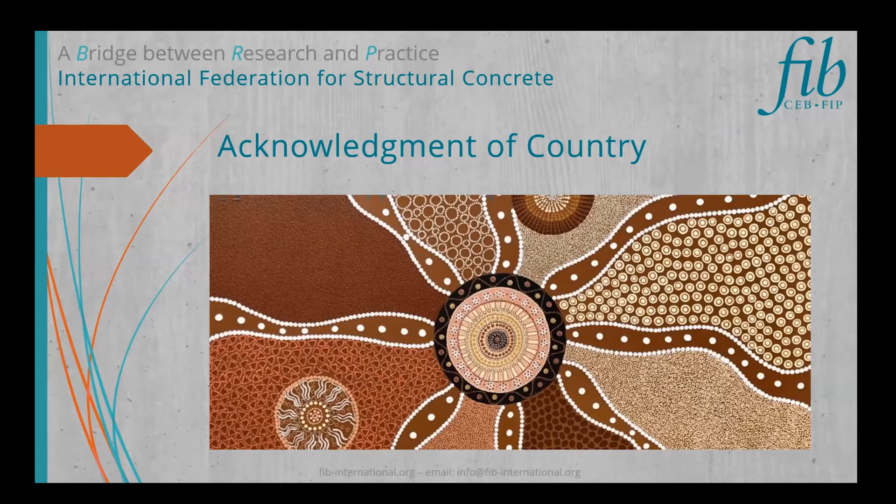But fundamentally, when we're looking into durability, we want to ensure that we can meet the requirements of serviceability that typically relate around the loading, the cracking, the deflections, but also those of strength and stability through the design working life without significant loss of utility or excessive unforeseen maintenance. And I think it's that latter part that is causing us a lot of issues nowadays. We all accept that we'll have to apply routine operation and maintenance, but when you have to intervene to apply major repair or rehabilitation of your structure, it is not meeting that intended serviceability and durability requirement.

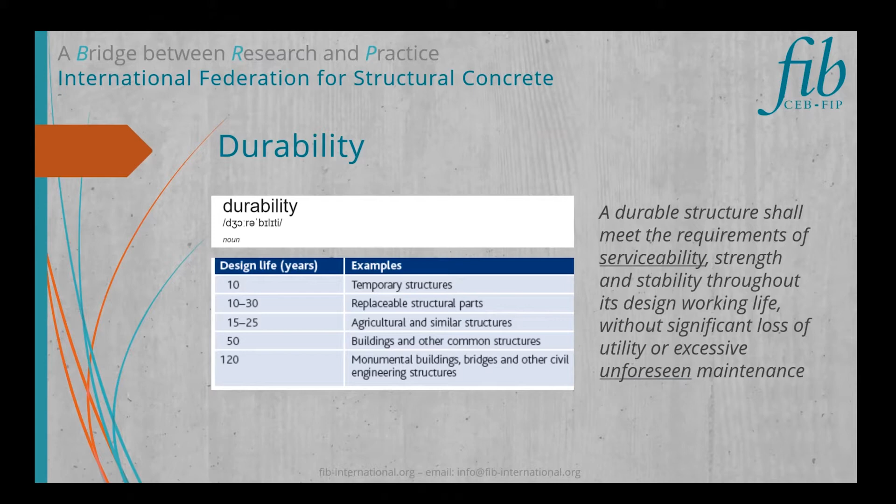Now, I do remember my early days, even when I was a student. Most people think of concrete as a material that is gray or brownish in color, and one that is consistent. In reality, concrete is naturally porous and it is inhomogeneous. And you can really get the appreciation of that when you slice through it and you put it under the microscope. It's very important to also remember that the size and distribution of all the pores in the concrete varies from one to another, and it really depends on the mixture of the constituent materials, the quality of compaction, the different materials that are used in the mix design and the location that one may be, the water to cement ratio, which will affect its hydration, and of course the curing that will be applied.

But fundamentally, concrete is not a proprietary product, it's non-proprietary. What that means is, while we can go and source concrete from different manufacturers, it's not a standardized product off the shelf in the same way that you'll go and buy a replacement light bulb for your living room. Also, the service life of concrete structures tends to vary. Now, in the past, we had a very simple approach of deemed to satisfy. So if the designer and the contractor met X, then its durability in theory should have been satisfied.

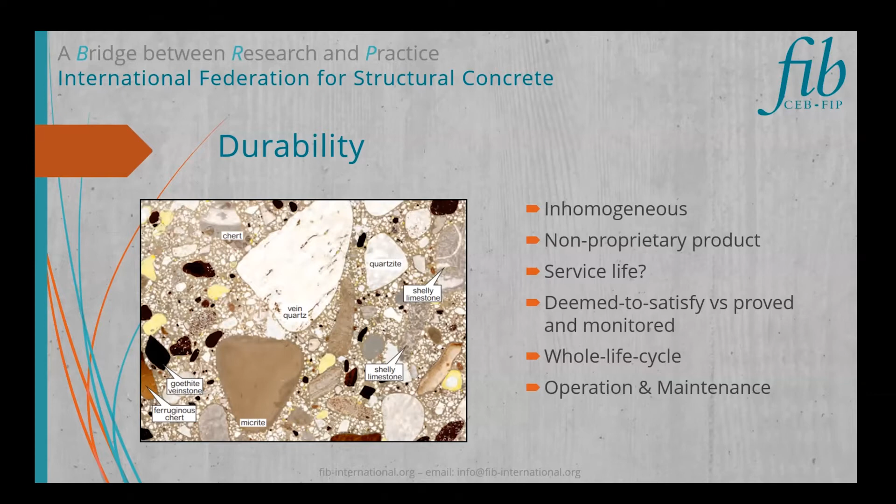Before we go into too much detail around hydrophobic impregnations, I want to discuss briefly the transport mechanisms for the ingress of water, gases and ions. Fundamentally, these are threefold. You've got diffusion of free molecules or ions, which happens due to a concentration difference. You can have permeation of gases or liquids through water-saturated specimens due to hydraulic pressure difference, or capillary suction of liquids due to surface tension acting in capillaries.

So typically, the majority of this will happen either due to diffusion or capillary action. Permeation, unless you are in an environment where you've got full water saturation and you are immersed underwater to have that hydraulic pressure, in the majority of cases doesn't happen. Capillary will tend to be the first transport mechanism that kicks in, because that's where you'll have that contact between your concrete surface and a liquid.

And in the long term, diffusion will add to that effect, because there will always be that concentration difference from the outer edge or outer fiber of the exposure face to the other side, or perhaps to your core, which may be at nil, and that concentration difference will continue to drive diffusion pretty much in perpetuity.

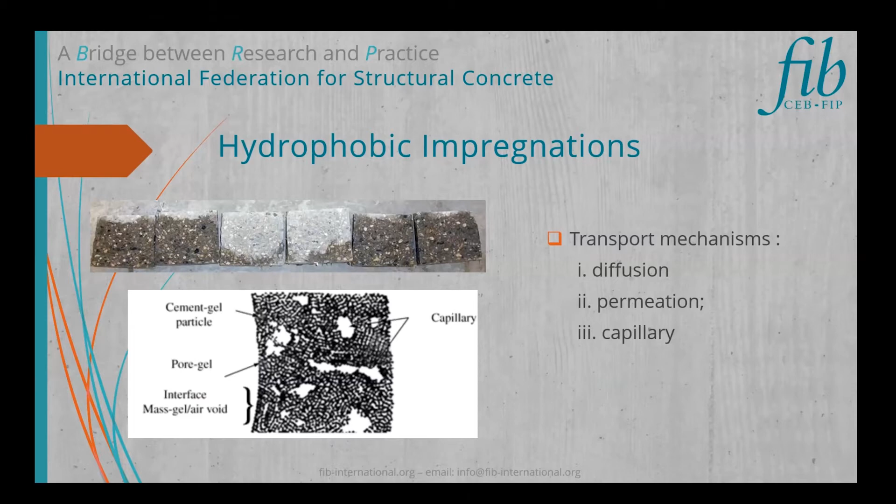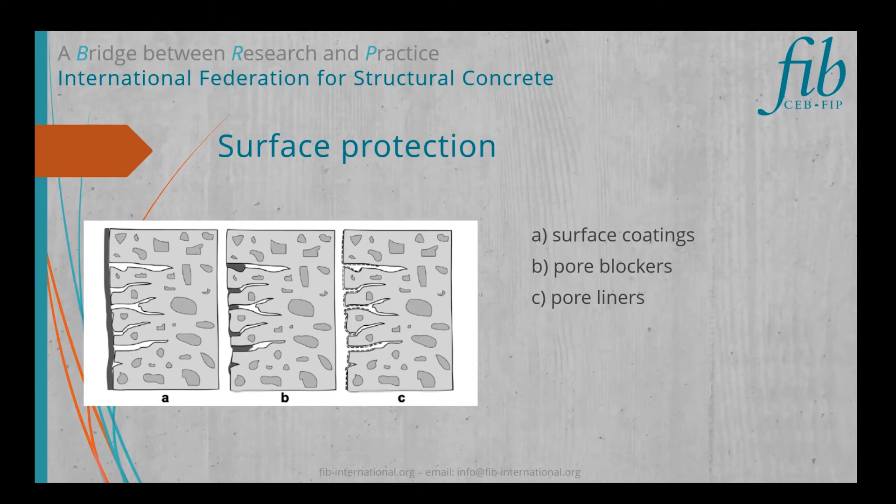Now that we understand the protection mechanisms, people tend to apply three different surface protection approaches. The first one includes surface coatings. They're very common, such as waterproofings or others. The second one is that of pore blockers. So there will be specific constituents that you may want to apply at the surface of your concrete in order to block those pores and therefore reduce that capillary absorption. And the third one are pore liners. Today, since we're talking about silanes, I will focus on that third form of pore liner.

Now, fundamentally, silanes belong to a group of silicones which contains just one atom of silicon. A typical example, and this is of an alkyl alkoxysilane, is illustrated in that chemical composition that you can see on your screen. You've got your silicon atom at the center, and then you'll also have your alkoxy groups, which will be linked to the silicon via oxygen bonds. So typically you have three or more.

In addition to that, you'll have what we call the organic alkyl group. This is the group that remains, and that's the one that will protrude through the structure of the silane, and it will provide that hydrophobic behavior on your concrete. Fundamentally, if you think about it and make it analogous to soap, the organic alkyl group provides that fatty character that will help you line the pore wall, and it will result in the formation of the hydrophobic layer.

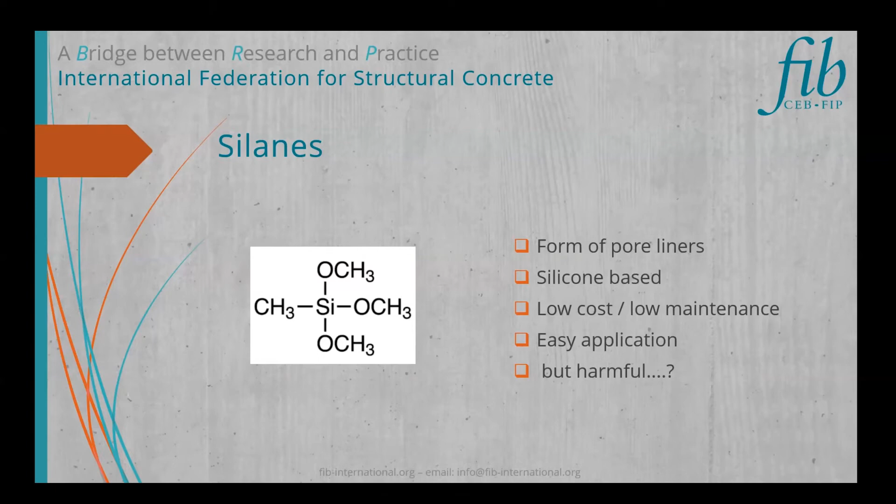But fundamentally, the surface impregnation of reinforced concrete structures is very useful because it can really help to prevent the ingress of water and dissolved deleterious substances such as chlorides. Now, a structure that is protected against water and subsequently chloride ingress can attain a longer life with a reduced maintenance regime. Therefore, this protection or repair method can be really effective in protecting the concrete from chloride attack.

In particular, surface impregnation is very well suited to surface areas which are not subjected to traffic, and as a consequence, there is no mechanical wear of that impregnated surface. In other words, there wouldn't be a pumping transfer of the deleterious materials into the substrate due to contact with the running surface.

It can also be used on brand new structures, not just on existing and aging infrastructure. And when you apply a hydrophobic treatment at that early stage, it can be regarded as an additional measure to protect young concrete and help it to achieve that service life. But equally, it's important to understand when you apply it what is the current condition of the concrete, and it's something that we'll unpack in a little bit more detail in the next few slides.

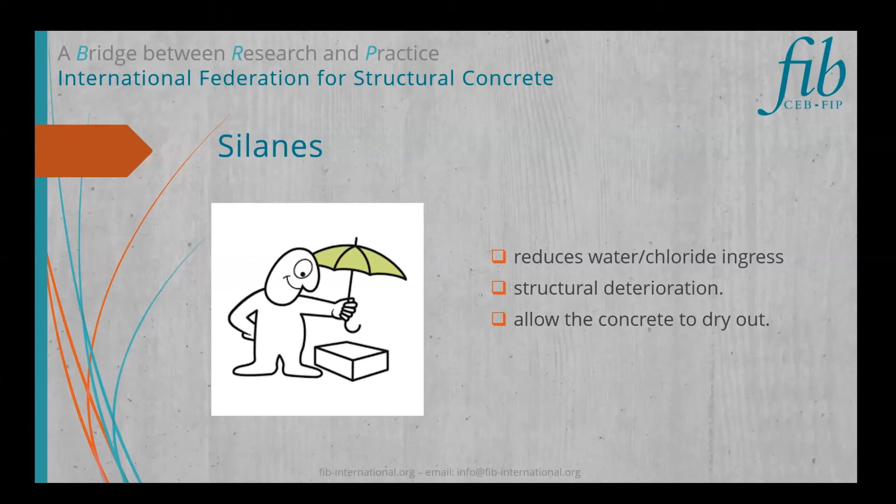So before you think that this is the solution for everything and anything, and you embark and start applying silanes and siloxanes across all your assets, it is really important to consider the following. First and foremost, what is the current structural condition of our assets? If our asset is in a very benign environment or very young in age and is not affected by significant chloride contamination, then definitely silane can be of help.

However, if we can already see that we've got significant chloride contamination and it has potentially reached the reinforcement level, and even worse, it has reached that critical threshold level, then silane will not do a lot, and it will not stop the corrosion process and also the destabilization of that passive layer on the reinforcement. So it's very important to really understand that.

Of course, we also need to take into account what budget constraints the asset owner may have. Money is finite, so making it go a long way is very important. Last but not least, one has to take into account what is the outcome that we want to achieve? Do we want to give a new lease of life to existing structures which have not suffered significant contamination? Do we want to simply slow down the corrosion rate temporarily by allowing the concrete to dry out and stopping new chlorides coming through?

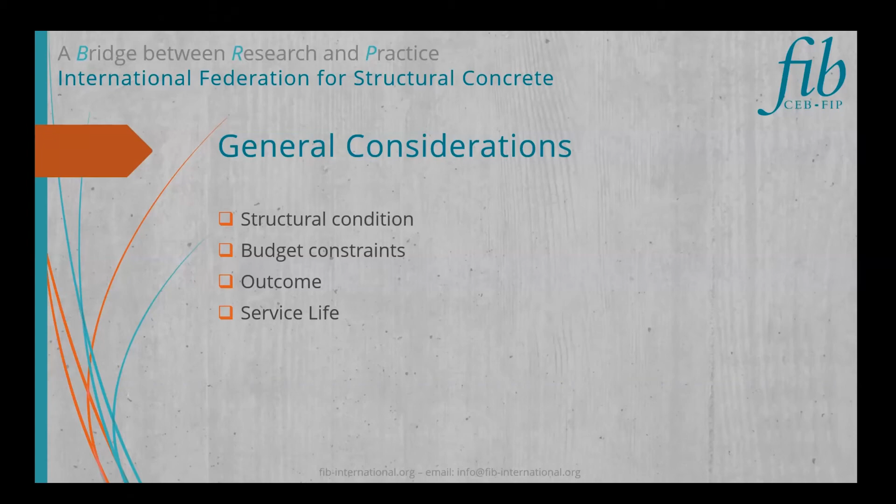In terms of design, we touched upon structural condition, and that is very important. Don't be surprised if your asset is already suffering from significant chloride contamination, and then you attempt to apply a silane treatment, and then you see deterioration of the concrete happening a few years later or at some point down the line. That's not to say that your silane treatment has not worked effectively, but it suggests that the contamination was already too significant and all you managed to achieve was a bit of a slowdown.

Exposure to UV can be a bit detrimental to the long-term performance of the silanes, and also rain. Now, especially the latter may sound a bit of an oxymoron because it's supposed to reduce the water absorption, but what this means is that, as part of the normal wear, it may reduce its effectiveness a little bit quicker than if it was sheltered.

You also need to consider the variety of products that exist on the market, and the surface preparation that will be required. This is linked back to the porosity of your structure, the moisture content, and the dosage that you may want to apply.

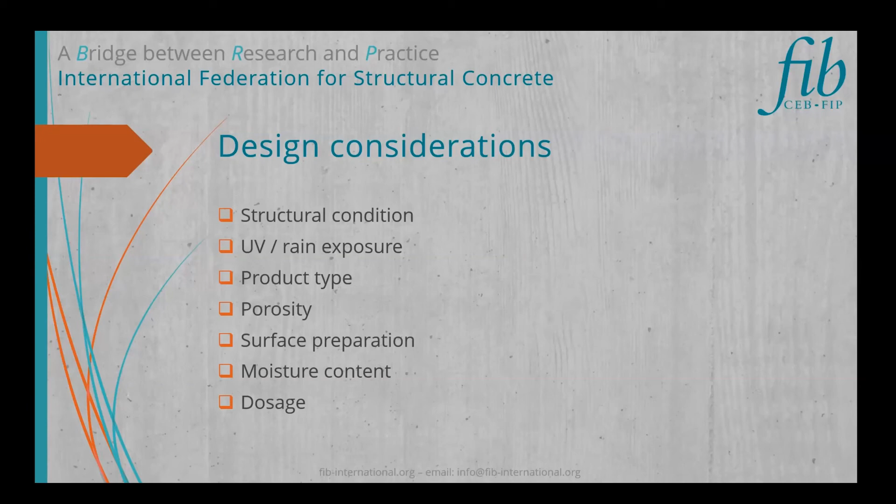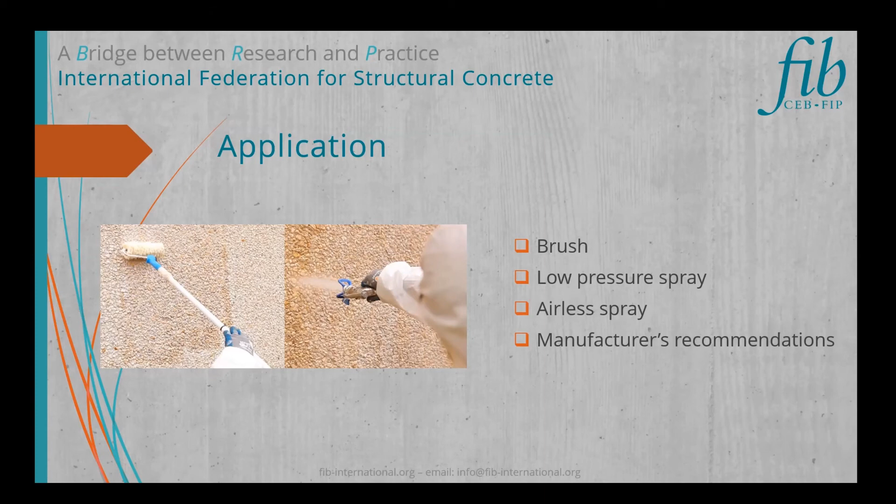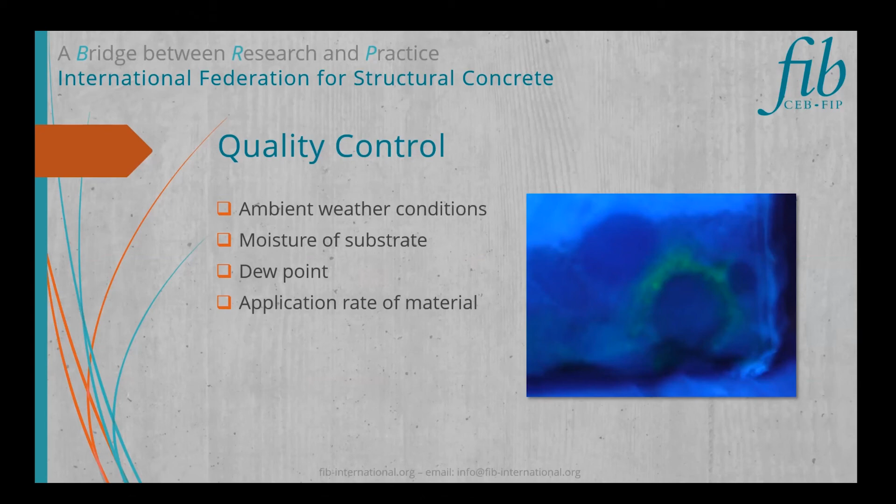Quality control is very important, so understanding and recording the ambient weather conditions is an important step of the application. Understanding the moisture of the substrate and the dew point, and of course the required application rate of the material, the dosage as we typically call it. All of these are factors that can affect the long-term performance of the silane treatment, and may make it last longer or shorter. It may also affect its penetration depth, and penetration depth has been shown through studies to be very closely linked to that protective layer and the long-term performance.

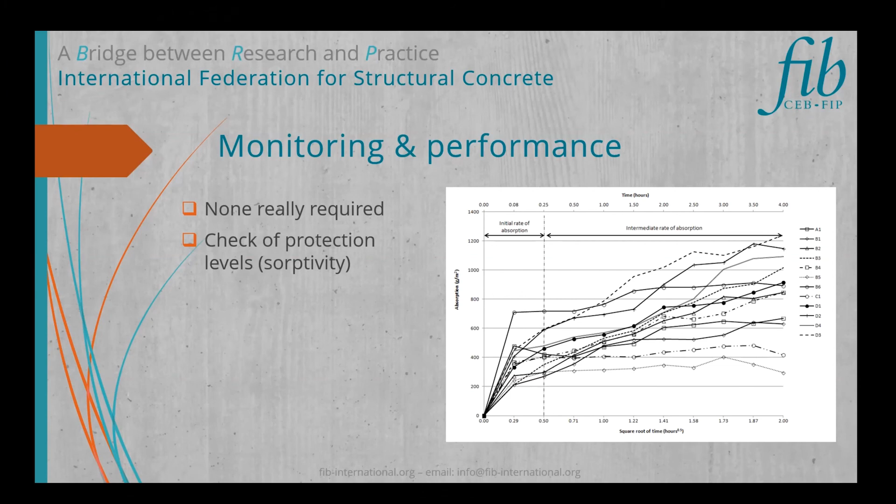In terms of long-term monitoring, in reality, none is required. The majority of these products are sold as apply and forget, but it is advisable every now and then to check the efficacy of the protection through sorptivity testing. An example of how you can do that is shown on that graph, where you can extract cores and check the rate of absorption of water.

I'm not going to go into too much detail on how you can calculate it. It's pretty self-explanatory. You can do that either by measuring the change in weight, which is the rate of water absorption, or by change in volume through sorptivity. And there are a number of both European and American standards that enable you to do that.

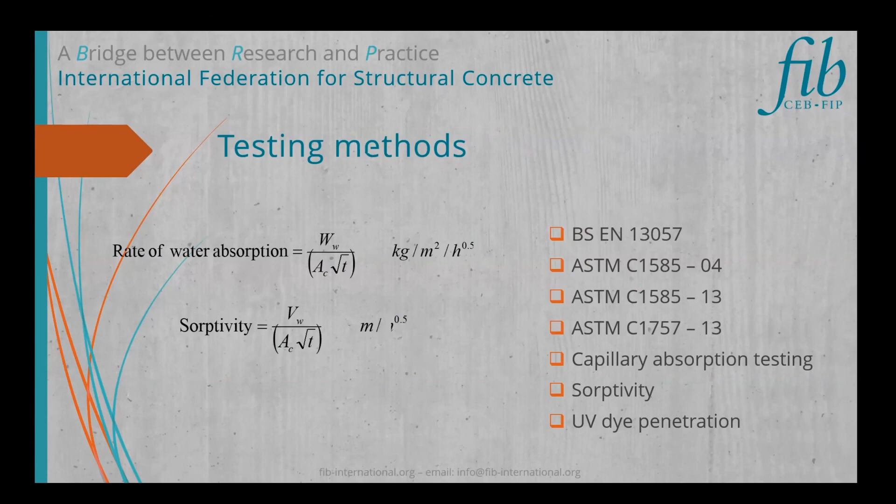Now, in terms of long-term performance, things are not as clear as one would like. That is because there are very limited studies that have looked into the long-term performance of silanes. But typically, most of these suggest that a life of between 10 to 15 years could be reasonable, but the exact performance will vary quite a lot. That is because the materials vary from one another, so you'll have that inherent variability, and they're very sensitive to the application conditions we discussed earlier. Again, it is recommended that every few years some samples are taken from the structure in order to verify the efficacy of the silane treatment.

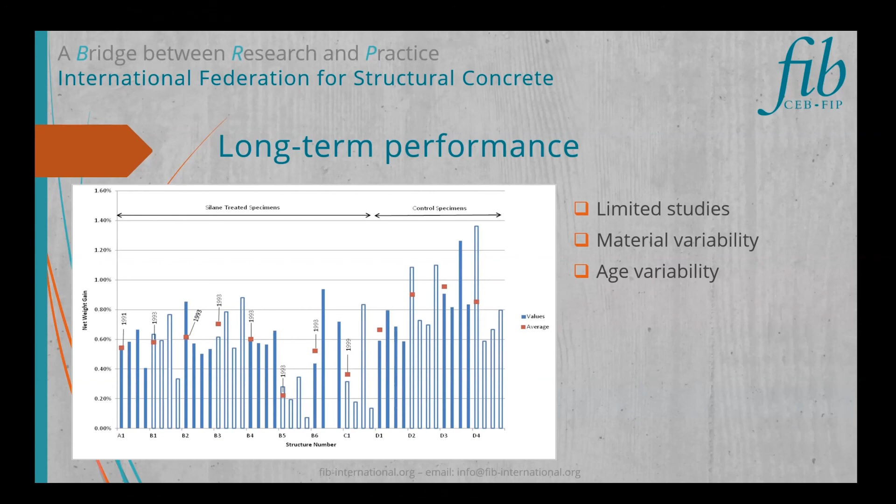So in conclusion, silanes can be a very low cost and low maintenance application. They don't require a lot in order to be applied, or any complicated designs. However, it needs to be recognized that there's a lot of variability because of the proprietary materials. And one really needs to understand that when you apply it, it is providing a sort of invisible protection. One cannot see it by simply inspecting it. But equally, we need to define the purpose that we want to achieve and how we can link it back to its long-term performance.